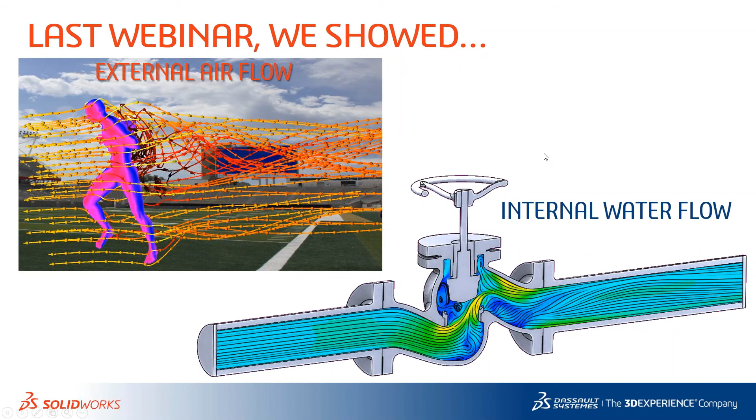You can look at this, and we'll come back to it possibly later on, but that's the focus for today. So just to recap, last webinar we showed two separate types of analysis: an external airflow calculation, where I was focusing on calculating pressure drops and drags, and also on meshing a very complex detailed model of a human running down the field. And then we did an internal water flow problem through a globe valve, and we were able to use our goals to calculate the CV value. So these are two different ways that you can use flow simulation, external as well as internal flow.

In that webinar, there are certain things we covered that I'm not going to have time to cover today: basically how to set up a new study, using a wizard to start from scratch or setting up a new problem from a template, using goals to monitor the calculation of specific things you're interested in, finishing the calculation when it converges, or calculating things like CV, pressure drop, drag coefficient. I showed you automatic meshing as well as manual meshing techniques for global as well as local areas, as well as adaptive refinement.

Result plots, I showed a few of these types: cut plots, surface plots, trajectories, and doing charts in Excel does it very well. And you'll see a little bit more of that today, because you can't get away from results when you're doing a presentation like this. It's very visually enticing as well, so we'll have a lot of nice visuals. And then there are multiple study types that I introduced: cloning, parametric studies, and running as a batch run.

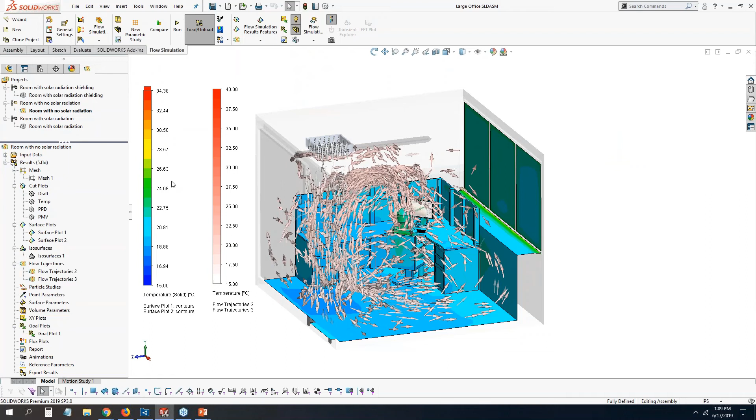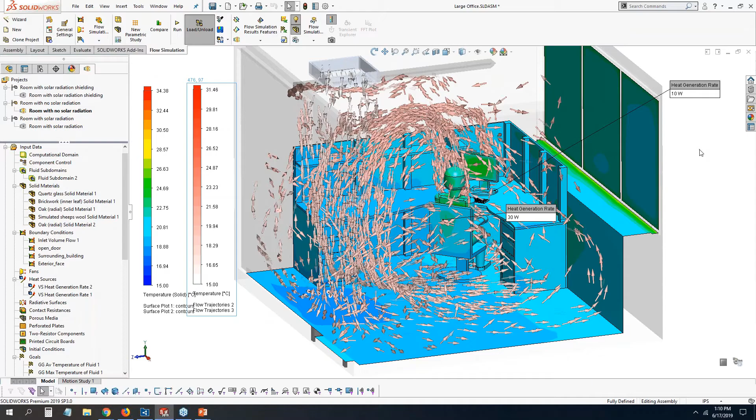All right, so in this example, let's play these flow trajectories here. What we have is a room with a dummy person working on a computer screen, and for some of these heat sources, I can display the callouts, so you have nice flags that you can show. The person here is generating 30 watts of heat, and the computer is generating 10 watts of heat. So you can see air rising, and I can change the temperature profile to get some hotter temperatures coming off of the body here. So you can see those listed like that.

Let me hide these callouts. This is just a typical setup that you would have maybe at night or after the sun has gone down, so it's a cool room. It's not really getting much above, say, 20 degrees C, 22 perhaps. But you can get an idea of the situation here. A little bit more of the setup is that we just have an inlet flow volume, so we know that there's an inlet flow of 200 CFM coming here.

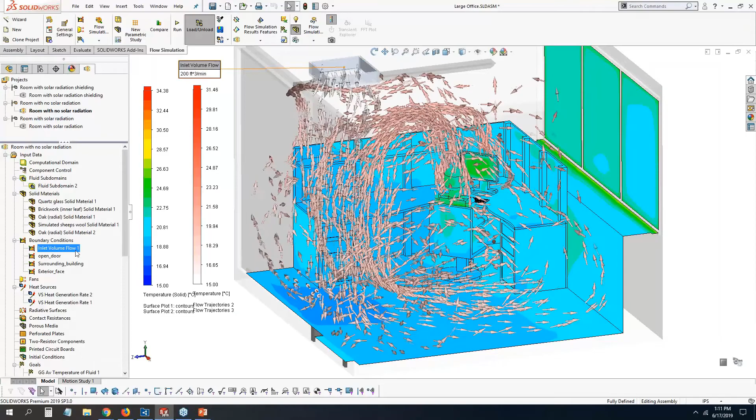Temperatures coming in at 15 degrees Celsius, I guess is kind of cold. And we can set those parameters here, thermodynamic parameters at 15 degrees C in our setting there. All right, so this person likes the room pretty cool. So we're just showing that as an example of that.

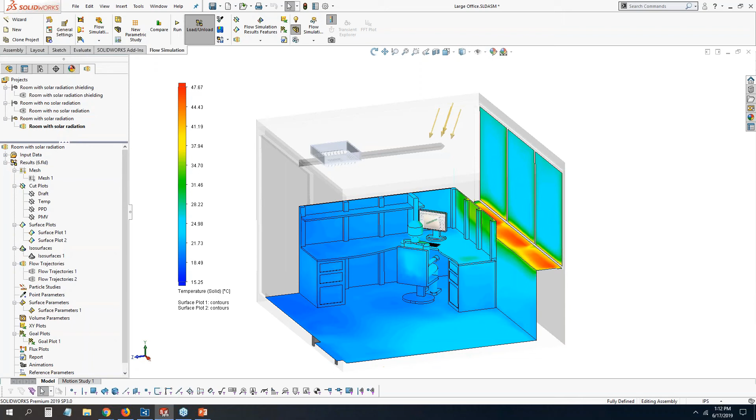Now, the situation changes when we have solar radiation, all right? And if we show these same plots for solar radiation, you can see that the solar radiation is coming in at an angle during a certain part of the day, and I'll show you how we can set that up. And you can see the result of that.

Sun is coming through the windows from the outside and heating up this shelf or area there, and even the person on this side is getting a little bit of that heat there. All right, so this is with solar radiation. Now, because this is such that you have that really powerful solar heat, and you may be familiar with that when you're sitting in a car or other things, the solar radiation can really heat things up.

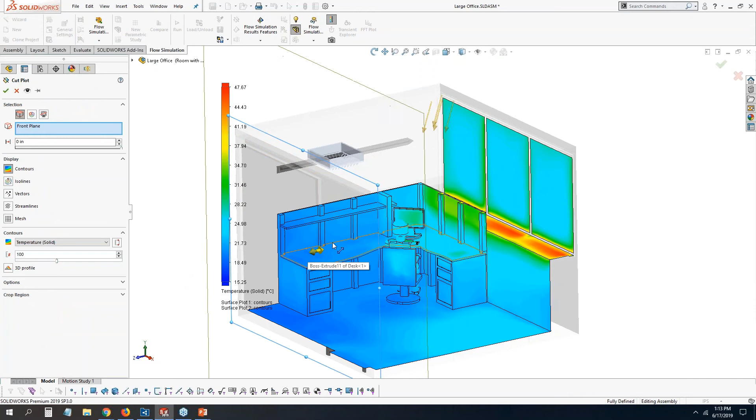So one of the things that we can use as parameters to determine whether it's a good environment or not, there's two ways, and I'll just show these at first. Let me do this cut plot, the predefined one here I set up. I guess it was not in a good location, but we can select here from our contours this predicted percentage dissatisfied, PPD.

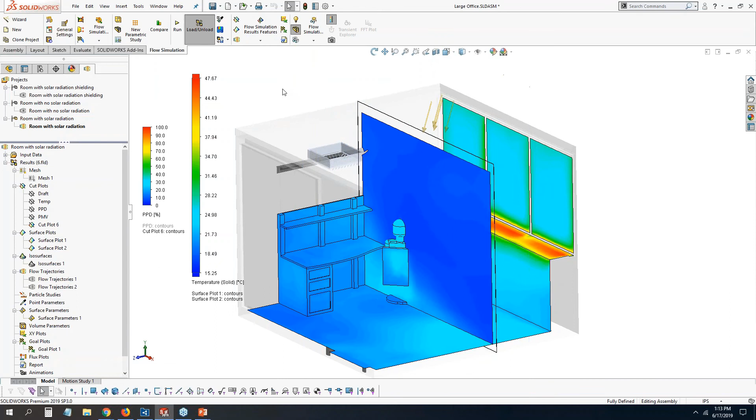All right, so you can see it goes from 0 to 100%. And if I move this along here to where the person is at, you can see it's relatively low, so it's a pretty good environment. Let me change this to have it on this plane here, and I can show a preview of this.

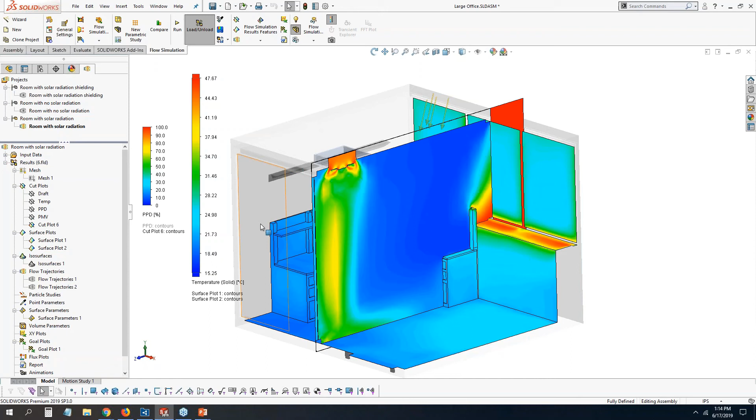So now you can see some more coloration here where there's areas, whether it's really cold or really warm, in which a person would not be satisfied in those certain situations. So these are specific parameters that you can calculate with the HVAC module, and it's a setting that you can define in your calculation control options when you set up your solving options, to click on here to calculate your comfort parameters. Now, again, that is only available with the HVAC module, all right?

And the solar radiation is something that I hadn't mentioned before, but with heat transfer in flow simulation, you can do all types of heat transfer, whether it be conduction, convection, and radiation, whether solar or environmental radiation, and you can do body-to-body radiation as well. If something is heating up, like an electric heater inside an oven, right? I have a simulation that I've demonstrated that can heat up the oven inside through just radiation, as well as conduction and convection to the air surrounding it.

Okay, so how do we set that up? Well, in our general settings, we have some options. So this is typically when you're setting up a new problem through the wizard and you're setting up your physical settings that you want to include. You can add heat conduction in the solid. It's always done within the fluid as well, right? And then you can add different radiation models. So one is called discrete transfer and the other one's called discrete ordinate. And I'll describe these a little bit better.

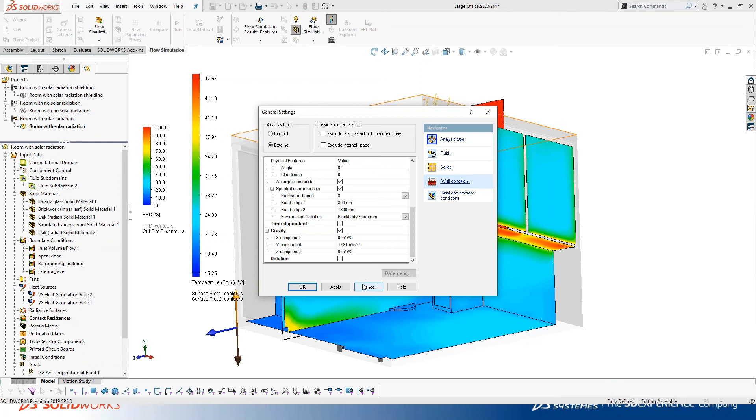And then, of course, when we're doing heat transfer, we want to include convection, and it's driven by buoyancy of the air as it is at different temperatures. So we always define gravity. So that's the basic setup for this problem. And you can see how percent people dissatisfied is set up here. Another parameter is predicted mean vote.

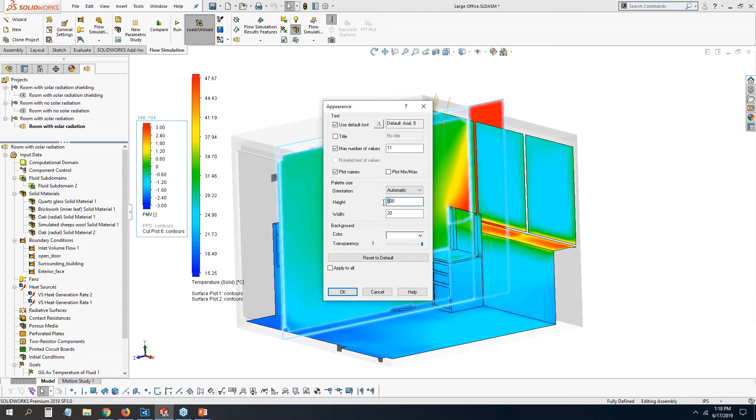And I'll show this, and it's on the scale between, and let me just set some options here so you can see it a little bit better. I'll make this 500. So increase it a little bit more here and set the number of colors. So these are things I didn't show before that you can do with the results. It's very interactive in a manner that you can define here.

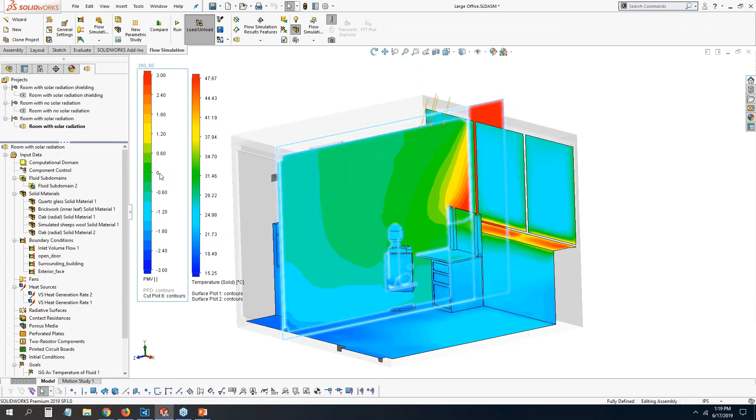So it's set from a scale from -3 to +3, and then 0 is the Goldilocks in the middle. So you have, as I call it, typically the Goldilocks values, right? So too cold, too hot, or just right. So predicted mean vote is set up like that. So those are two different ways that you can define as ASHRAE parameters when you set up.

And I will mention that if the person is here doing work, if you have it in a factory and people are working or something like that, you can actually define the amount of clothing that somebody has on and the amount of activity that they're doing. So those can all play into how those parameters are going to affect the people that are in that environment.

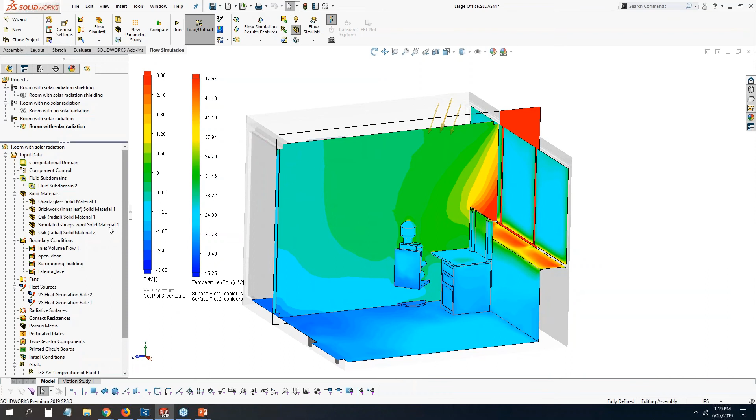All right. And then this other project, the final one I'm going to show for this one, and you can see by the descriptive name that I put in here, is with solar radiation shielding. So the glass, we can add some shielding onto that by defining that with a quartz material that will absorb the energy of the sun, right?

So when we're defining the material properties for the glass, both on the outside and then there's some glass windows here for the interior of their office, we can set this parameter and it sets it up as an absorptive type of flow. Now that's only again available with that discrete ordinate method, which is part of the advanced radiation module within the HVAC. All right.

So a little bit more information into this. In our material library, you can see here the absorption coefficient for radiation can be set through a table. And this is basically typical of glass material, and I'll show it in a little bit more, that it has certain bands of absorption at different wavelengths. So different wavelengths and the amount of absorption coefficient is defined like that.

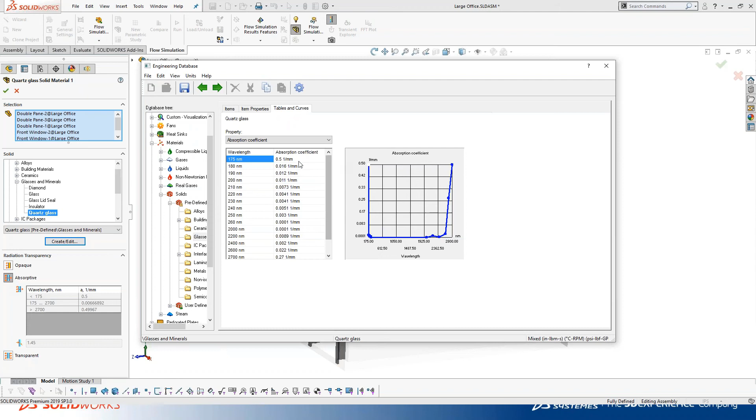So when I set up the absorptive radiation transparency, we have those 3 bands, and then it can calculate what the average values are in the wavelengths less than 175, between 175 and 2700, and then above 2700 nanometers in this case.

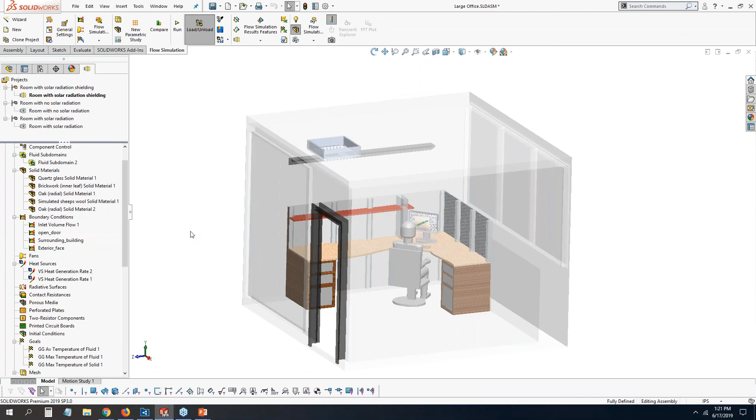All right. So now when I show the surface plot for these, and we're using the same scale, you can see that the reds are no longer red, they're orange, meaning a little bit cooler than before. So we have that absorption through the glass there, benefiting that, right? So that's an effect of it.

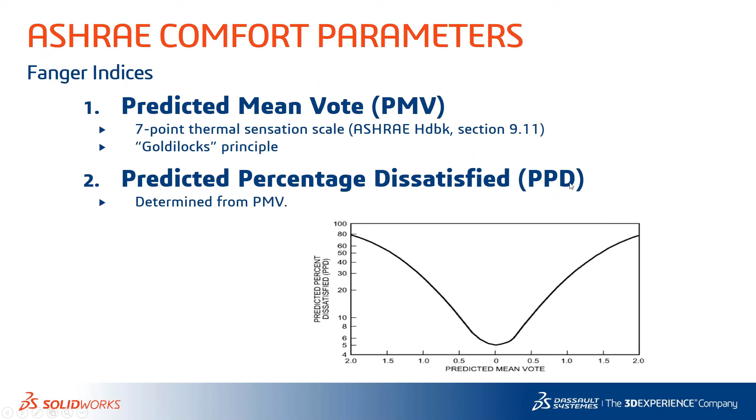So let's go to the PowerPoint and just review some of the things that we learned here. So these ASHRAE comfort parameters that I showed are actually called Fanger indices. We have the predicted mean vote, which, as I showed you here, is on a scale from -3 to +3. And the Goldilocks scale in the middle is where you want to be. And then from this scale, you can get a predicted percentage dissatisfied. I think I said percentage people dissatisfied, but that basically captured what it was, even if I got the initials wrong.

So the radiation, advanced radiation that you get with the HVAC can do a bunch of things here. You can also do irradiation at the surface, and then absorb it, and then transmit it. And when it gets transmitted through there, because of the change in the speed that light moves through, or radiation specifically moves through solids, it changes that, and you get a

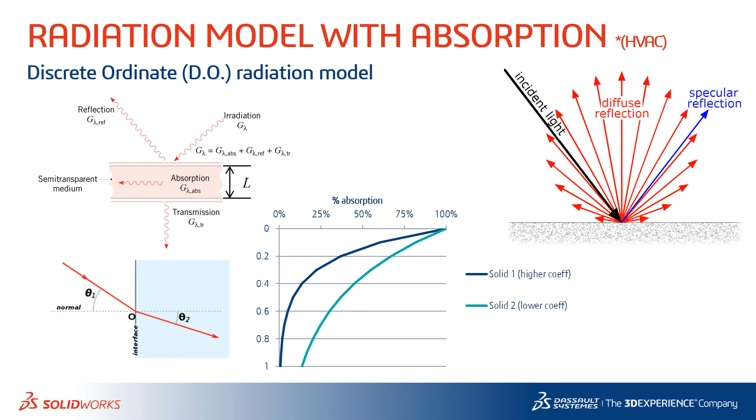reflection, right? And also, this handles not just specular reflection like a ray tracing method, but it can also handle diffuse reflection. And what this is showing you here is just basically how through the thickness of the material, with a higher coefficient, you get more absorption into the solid.

And this is showing you application of a thermal heater. Maybe this is a light with glass on the front of it, and showing you external flow around the outside and the temperature here. And this is showing you as a half symmetry model.

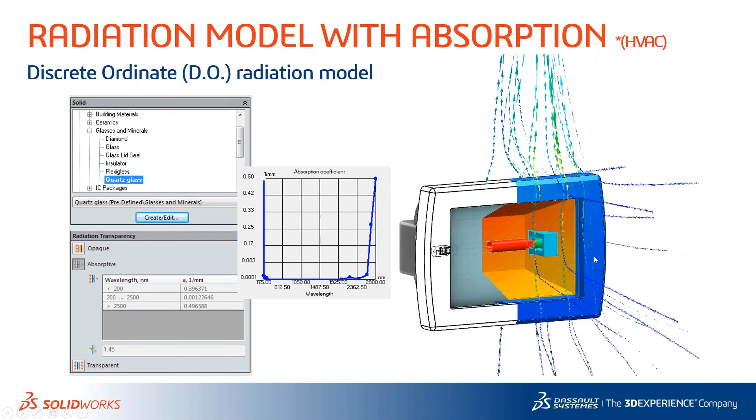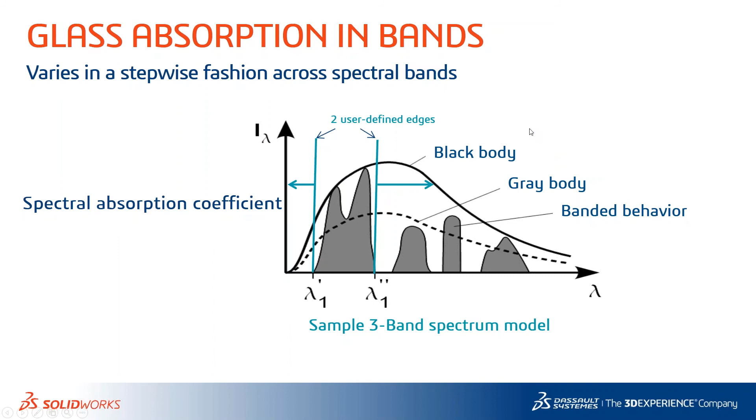So as we were reviewing those setups, I also mentioned that we have glass absorption in the bands. So glass typically lays up into different absorptions based on the spectrum as a banded behavior that we can really capture with this radiation model rather than doing it as a black body, gray body type of situation that you can typically do with ray tracing, setting up the emissivity values. So it's more comprehensive and can allow for real environments that are having these conditions like glass that you need to really include as part of the simulation.

And another type of simulation you might want to investigate is what happens when you're designing an HVAC system - what if a fire breaks out in a laboratory, right? Now, another thing within the HVAC module is the ability to do a tracer study. And then you can track if it's safe or not, and how much is the contamination removal effectiveness.

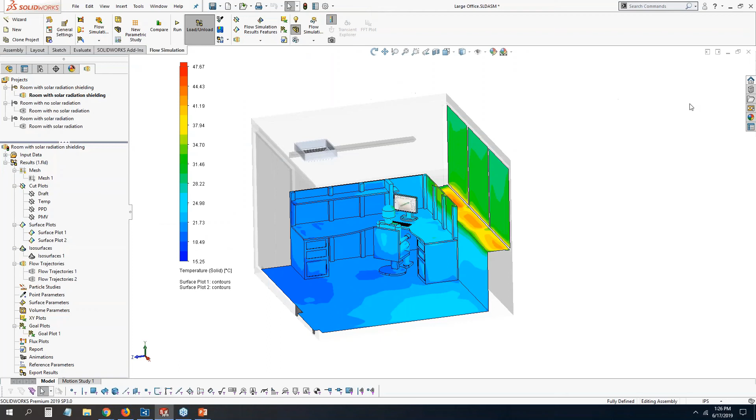So let's take a look at that with this next example model. I'm just going to pull that up here. And so the first simulation, real quickly, I'll just load this in, the results.

So we can define a heat generation rate. So this is the location within the lab that the fire, say, is generating a certain amount of heat, and that can be rising up. So the first thing when you're doing a simulation like this is that you run the flow simulation of the HVAC system, okay?

So we have an outlet here. I believe this is in the units that we've chosen. It's 211 cubic feet per minute, but I remember that this is 0.1 cubic meters per second in SI, the main SI unit. So that's about 200 CFM. And then it's pulling in air from the outside through these two grates here at the bottom.

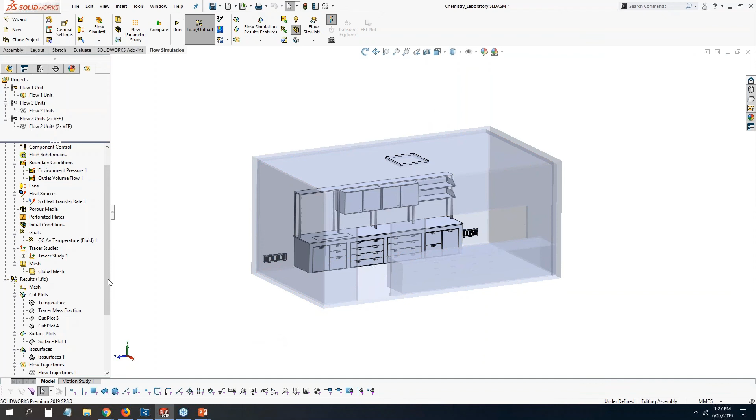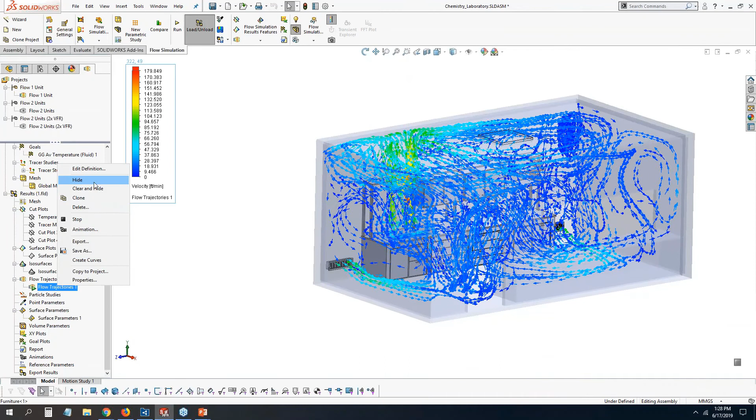So with the heat rising through here and the HVAC system fan pulling up the air out through here, we can see the flow trajectory is moving, and as you'd expect, the heat rising up above from where that fire would be. So this is getting the calculation of how the air is moving within the room for that system. And let me just hide that.

So now, once that simulation is done, you can introduce a tracer study, all right? And a tracer study is not a typical thing unless you're doing it very frequently that you would add into your tree, right? I think I mentioned this before, that you can customize your tree and add things that you typically would have within a study.

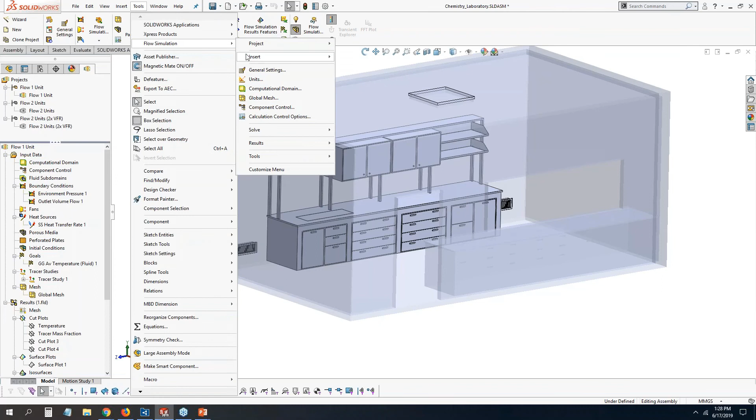And you can choose that here. And so if that isn't within your toolbar, you can always add that and insert a tracer study through a tool here. Let me see here, results - usually I just have it in my tree, so I'm not, but there's, here it is, insert a tracer study. So you can insert that into your tree for that particular project as a one-time thing if you wanted to do that. And then we can set up a new tracer study.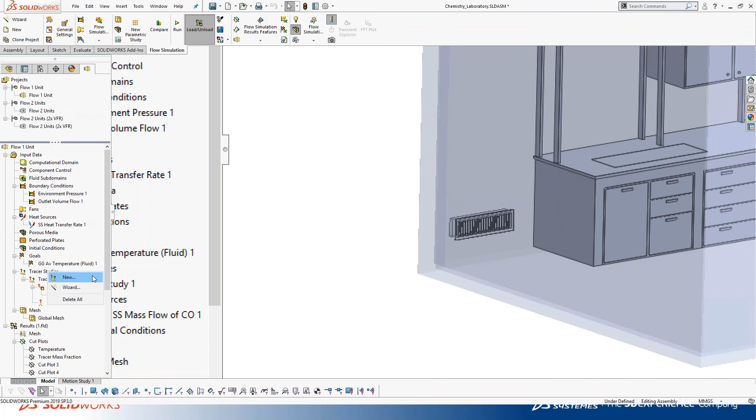Let me zoom in here so you can see this a little bit better. And it's similar to the way that we set it up from a whole new project. You can either do it new and set up all the settings manually, or you can go through a wizard.

So it's just working on that here. And the two things that we're going to be able to calculate from a tracer study is the local air quality index and the contaminant removal effectiveness.

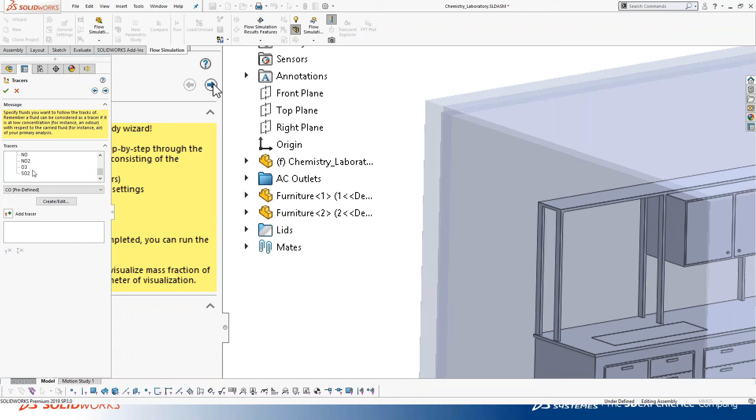In our tracer study wizard, we can click through here and define different tracers. These are different contaminants, as you can see: hydrogen sulfides, carbon monoxide is the one we're going to use, acids and things like that, SOXes and NOXes, I like to call them. Those are all different types of contaminants, and we can add that tracer.

Then we click on here whether we want this to be time dependent, running it for a certain amount of calculation time with a time step. Then we can find out what's the mass fraction in a location, so we'll put in, say, 80% mass fraction. The location can be a volume or a surface, so we'll define that. Then we can define this as a mass fraction mass flow or specific mass flow that's per unit volume, I believe. So mass flow here, we can set up like this.

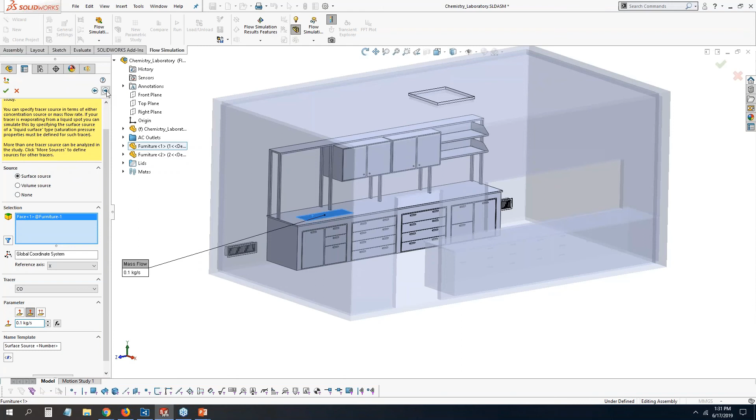And then you hit the run button. I'm not going to run this here live, but we already have the tracer study 1 that I've set up, and we'll take a look at the mass fraction of this tracer study.

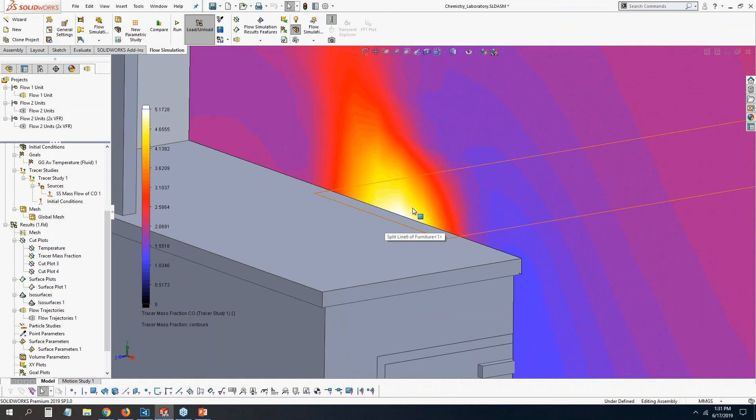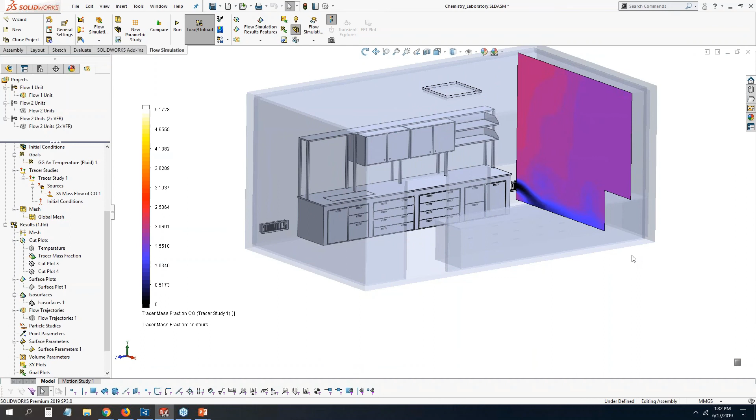You can see that the warmer areas here are where you have this contaminant rising up, and it still has quite a bit of mass fraction even at the floor. Let me play this, and it'll go back and forth through the entire room. So we have everything calculated in 3D, and we can show where the contamination is. So if you were going to try to get down on the floor and crawl out when this fire is, with this HVAC system set up, you probably have more difficulty getting out without choking on some smoke and things like that.

So you can change the units. Have 2 units that are equally combined to output the same amount of flow rate as the original one, but now it's separating them into 2. That's all done through configurations. And then because we're adding 2 different things, I add another project where now this outflow here is doubled. So each unit, instead of having a centralized fan pulling the same flow rate, each one has double.

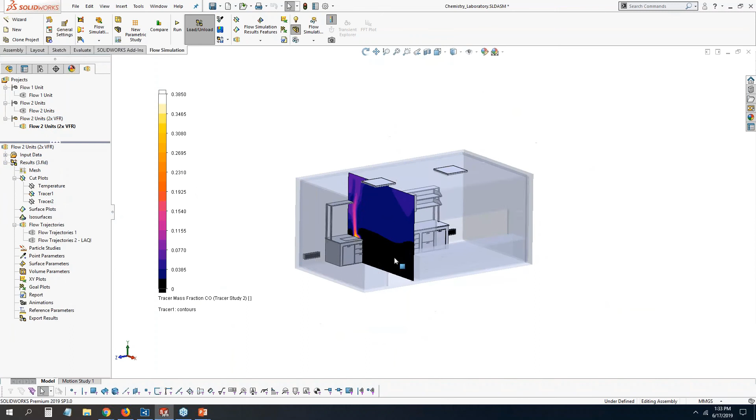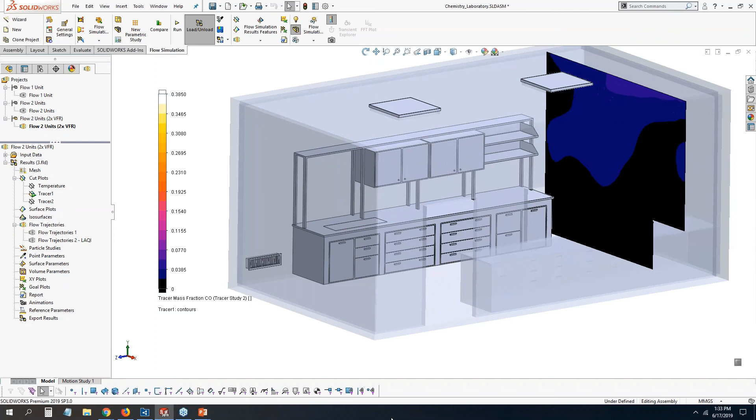So we can take a look at what this would be. And now we see the colors in black, meaning that the mass fraction is quite low, and it's not even going up all the way to 1. So again, if we play this, you can see that now in this situation with the correctly defined HVAC setup, you are able to get down on the floor and get out of that room safely. So that's what you're looking for.

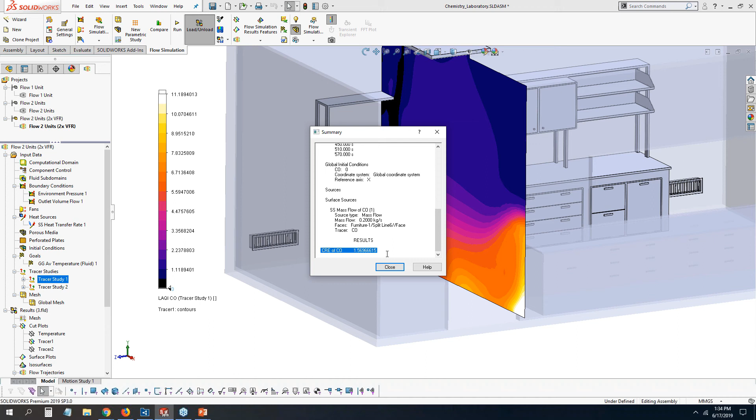So a couple things: we have local air quality index, which is another way that you can visualize those results. And in the summary, all the way down at the bottom, is where you can find the contamination removal effectiveness, which is a value that I had mentioned before that you can calculate through here.

All right, so based on time, I wanted to jump to this electronics cooling module so we can take a look at what we can do here with this type of thermal analysis. So why is this important? Because trends in the electronic product design field is increasing complexity in designs. Components are evolving, and we can add more complexity because we're using tools like SOLIDWORKS and our ECAD solutions to do these simulations. We have denser packaging, smaller spaces that are driving up the power densities. And we can use aggressive cooling techniques in smaller enclosures to remove all of that heat that we're generating.

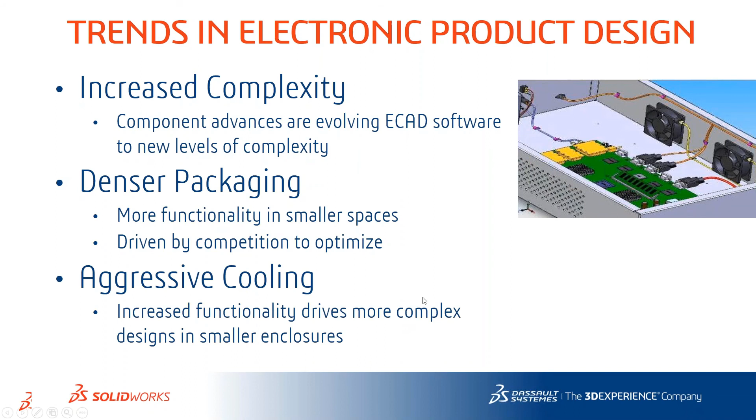I did want to mention, and I've written a blog post about this in more detail, the differences in thermal analysis capabilities that we have in our Simulation Professional software, which is an FEA solution, versus the CFD that we have with heat transfer, doing all heat transfer methods. The main difference is that the FEA is really solving just the thermal conduction problem.

The convection and radiation have to be done as models, whereas a flow simulation, as you can see here showing the flow streamlines, as it's heating up for a natural convection problem, you can see the flow pattern. It's able to calculate the H value, which is your heat transfer coefficient, which is very localized, and you're going to get different results in those locations where you have air moving. So there's very localized variations, and that makes it more realistic.

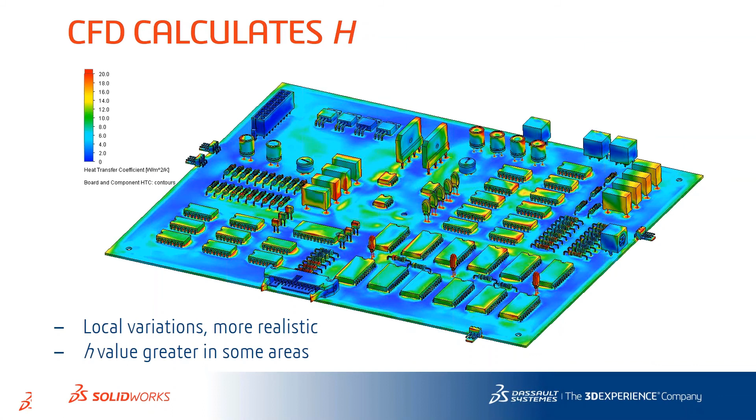So I like to use the analogy of a stadium. On the left-hand side is where we have SOLIDWORKS Simulation Professional, and on the right-hand side is where we have SOLIDWORKS Flow Simulation, or SWFS. The FEA approach is like the Goodyear Blimp - it gives you a good overview of what's happening, maybe a bird's eye view. But if you're looking for more accurate results and want to get closer to the action and more realistic, you want to get in that front row seat by using flow simulation.

So you can get very accurate results, even within a small percentage of actual results. It may happen to just differ by how you set up the problem and how that reflects what is happening in the environment around you.

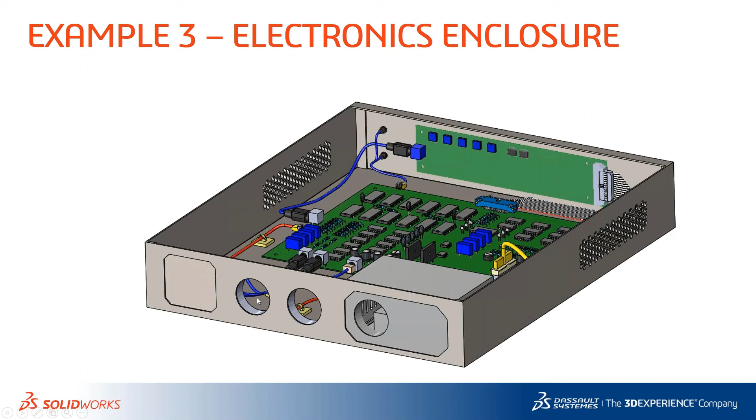So the third example I'm going to show you is this electronic enclosure. You can see there's a lot of detail within here. What's not shown in this image is there's 3 fans, and we're going to actually simulate that through a fan curve, so that's why they're just simplified here. We're going to investigate how we can use a solution to look at 3 different possible ways.

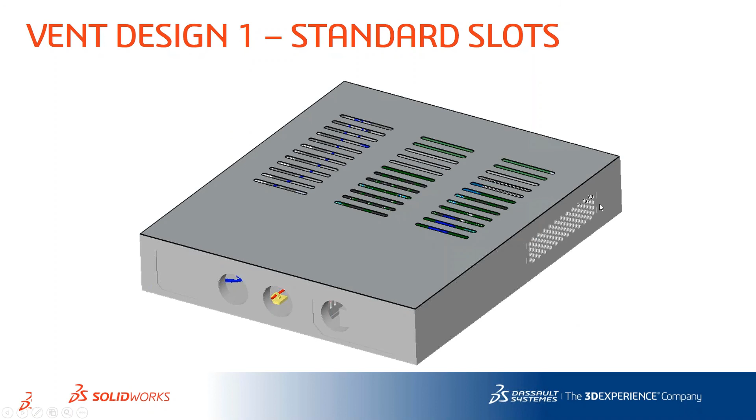So this is a forced convection problem, and we can have a top that has no vents on it, so it's just a solid top. One that has vents on the top, some slots, something very standard. You'll notice there is some venting on the sides using a hexagon shape as well, and that's true even in the solid top - the only thing that's changing is the top.

And then we have a custom venting design that's very open, a lot more space letting the air move out. The idea is we would think that maybe letting more air escape through the top will be a better solution. So let's take a look at how we can set this up in SOLIDWORKS Flow Simulation.

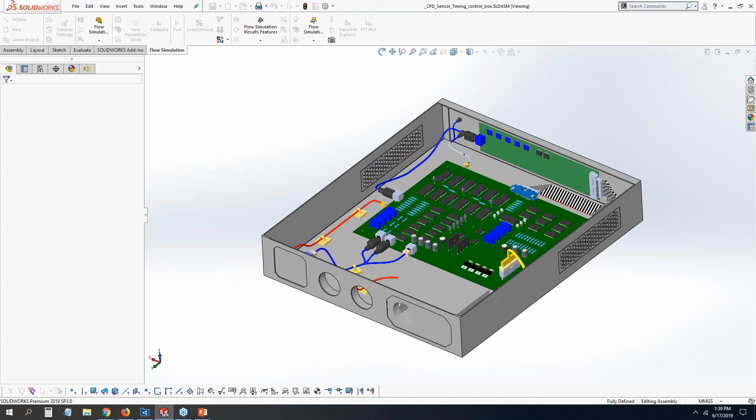So there's a lot of things going on in this electronics cooling module that can really help you out with solving problems just like this, and I'm going to help highlight what those are. One of the things is that we have a whole library of solid materials.

The library has been increased with not only solid materials - we have additional alloy materials, polymers, interface materials, integrated circuit packages, metal. So that's been increased.

Also, while I'm in this interface, we have fan curves, not just the standard fan curves from Papst that come with the standard package, but all of these different ones from Comair Rotron, Delta, all the major fan manufacturers used for electronic enclosures that you can list here: Sanyo Denki, Sunon. These are all ones that I have used in different applications, depending on what the customer is using and things like that.

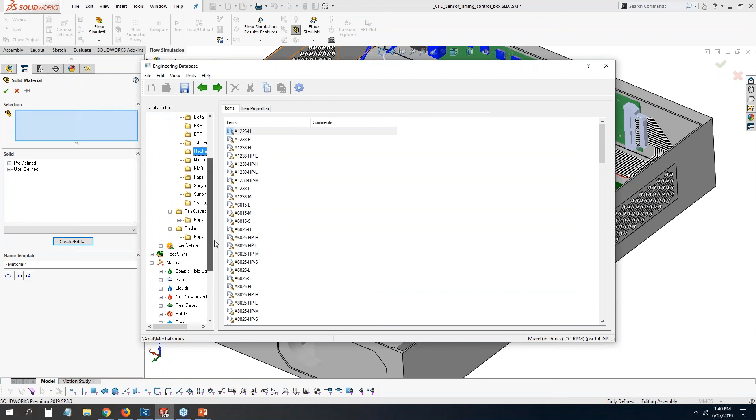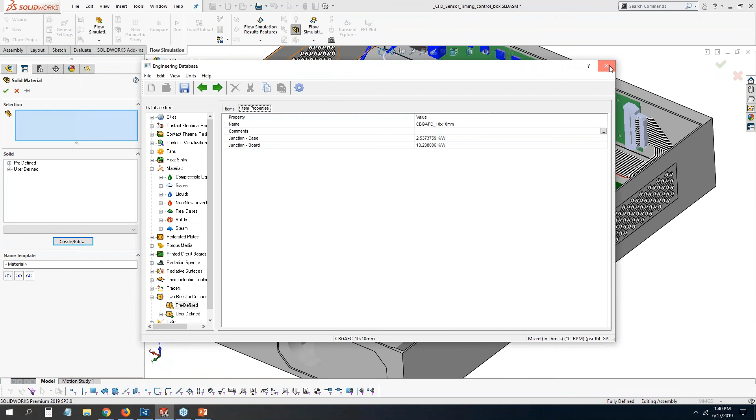And then also we have 2 resistor components. I'll also mention all these ceramic ball grid array, chip array, small package - these are all just defined through a junction, junction to case, and junction to board temperature. Because at the end of the day, what we're looking for is the junction temperature.

So the library is a big feature - these are not things that you have to go out searching for on the internet or from other sources. They're available right from this library that we offer with the electronics cooling add-on. So that's huge. We've defined all these different materials, for example a typical chip material for all these integrated circuits on the board.

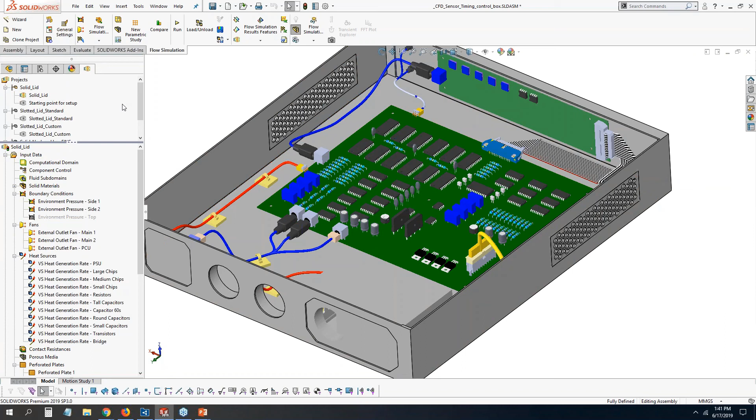Now, the definition that we're going to define for the flow is just two pressures on either side that are open, in this case, to the hexagon perforated plates on the sides, as you can see here, right? But because we have these hexagon shapes, there's certain geometry, and they could even be smaller. You might see on electronics very small dots and things like that that are used to allow airflow.

A better way of approaching that problem is through defining perforated plates. So basically, you can simulate the pressure drop that is happening through a plate like this simply by defining some parameters in this perforated plate setup. So you can define it as a regular polygon, rectangles, round holes, or even a complex shape.

And with this polygon, since we have a hex shape, we have 6 sides, each having a side of about 0.15 inches, 0.14 inches. And then that calculates the free area ratio, which then defines the loss of pressure that is going through that. So that all comes into play. Let me go back to my slide here. I hit the wrong button to get out of the zoom mode.

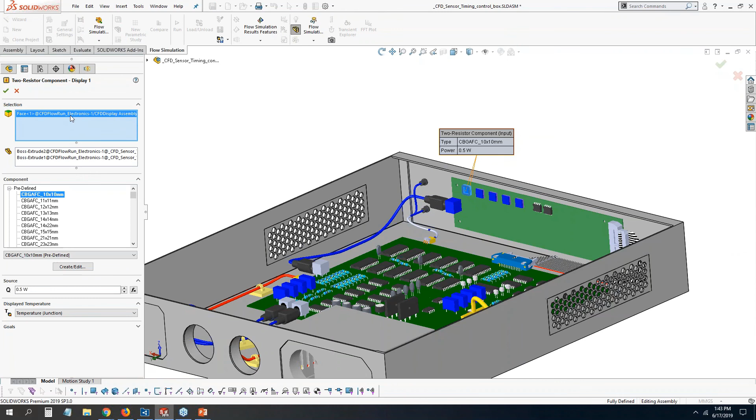And so you can simplify the model and accurately include these shapes without having to mesh them. So there's perforated plates, which are again part of the electronics package. And then we have some components that I alluded to in the library where we can define 2-resistor component definitions. So you can specify where the hot side is, okay? So that's the outside ambient selection.

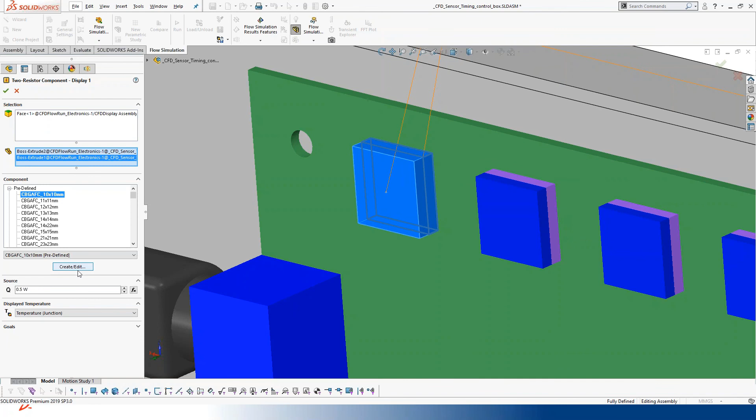The components that are included within here, so we have the board to junction, and then junction to case. And those are then defined with the amount of heat that is being dissipated. And then the ceramic ball grid array, 10 by 10 millimeters, has in this case, the first one, that thermal resistance value in the units of Kelvin per watt. So every watt, this is the amount of temperature that it is increasing.

So again, you're simplifying this package here, and you could have several of these, and these are all defined the same way, just by a simple vertical thermal circuit. If you think of it like an electrical resistor, this is the thermal resistance, and you have 3 nodes: the board, junction, and the case.

And when you define this thusly, you also have a goal that you can set up automatically to give you the junction temperature, and then set that up as a goal that you can use for convergence if you wanted to. So that's nice to have.

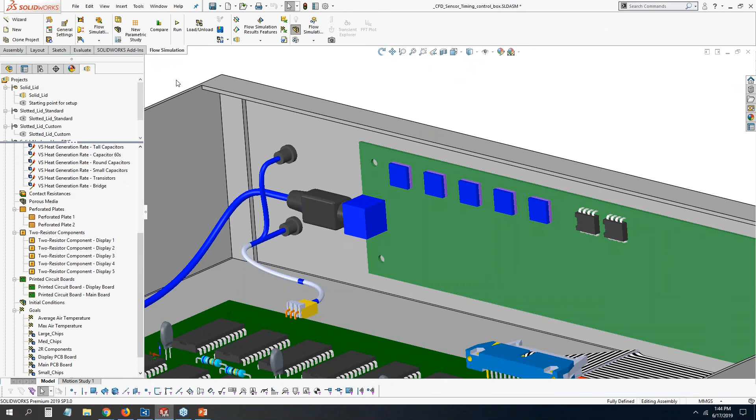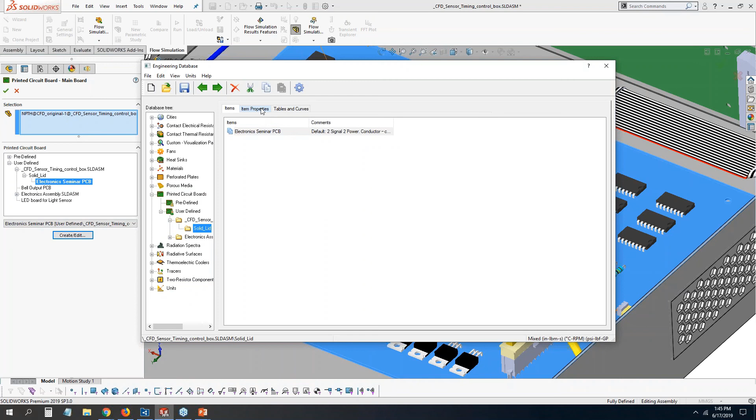And then we have printed circuit boards. And you can see here that we have a simplified solid model that is defining the circuit board, but in reality, there's different layers of copper on that and everything, and we want to capture that. So we can define a printed circuit board in a way that, again, through the library, you can set this up. And what it does basically is, these are automatically set up.

So you have FR4 material, which is your dielectric. These are all the material properties for that. The conductor, these are all the properties from copper. You put in your total thickness of the PCB, and then all these values, which are in-plane and through-thickness conductivity, all of these ones in gray are actually calculated, right? And then for doing a transient analysis, you need the effective density and effective specific heat.

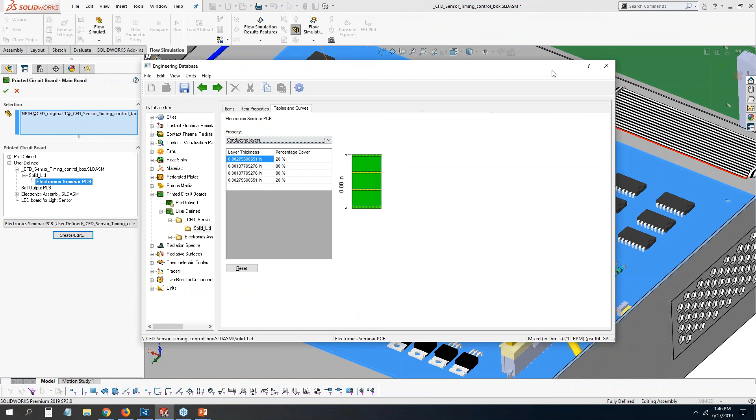But you're basically setting up in a table that you can get from a PCB manufacturer the thickness of each layer and the percentage of copper of the conducting material on each one of those layers. So this is a simple 4-layer board, defining the amount of coverage of the conducting layers on that. And what that then does is, as I mentioned, heat can spread out along the board laterally, but through the thickness, it's not going to conduct as much. And that's how it is in reality when you have PCBs.

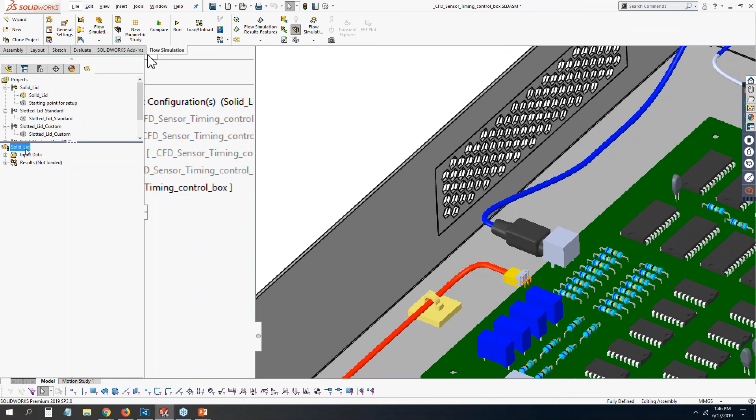All right, so we have these solid lids, and then we have different configurations that are set up here. Solid lid, the custom slotted lid, and then the standard slotted lid, right? And I showed you last time how you can clone a study, right? And copy the results, and then this would be a slotted study. And then using configuration, we can select the slotted lid configurations and then just clone those 2 studies and then run those in a batch run.

All right. And let me load these results for the solid lid. And once all of that is done, you have all the results for all 3 different situations that you want to set up.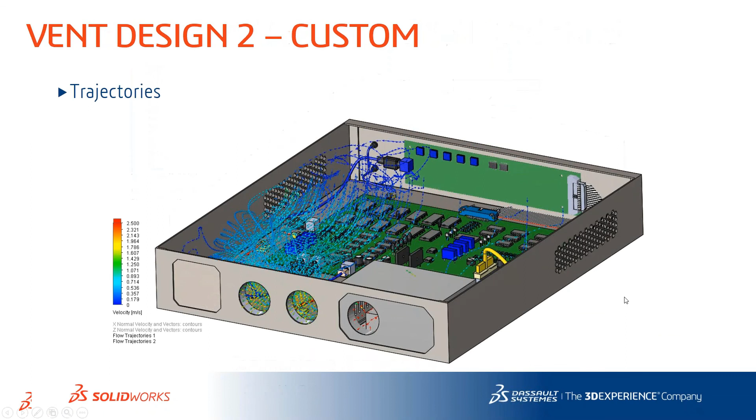We have the custom one with the custom vent design. And then this is what you can do. You can compare the results. So I wanted to show you how you can do this through here. So the compare results. So we can take a look at different things. We can take a look at images.

We can take a look at any one of the plots that you want to compare, and everything will be set to a standard slides. But we're going to do this just as charts. So we set up some goals that we want to use for comparison. And then we choose which projects that we want to compare.

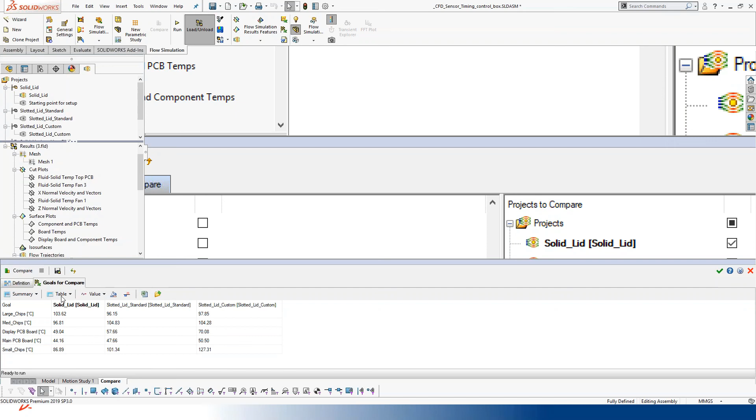And you can see here then the results after you hit the compare tool, and you can show these as a table, you can show them as a chart, and I prefer to show this as a bar chart. And then you can export that out to an Excel spreadsheet, and it dumps it out directly into a format just like this. Then you can present these results, putting them into a PowerPoint, just like I had done here.

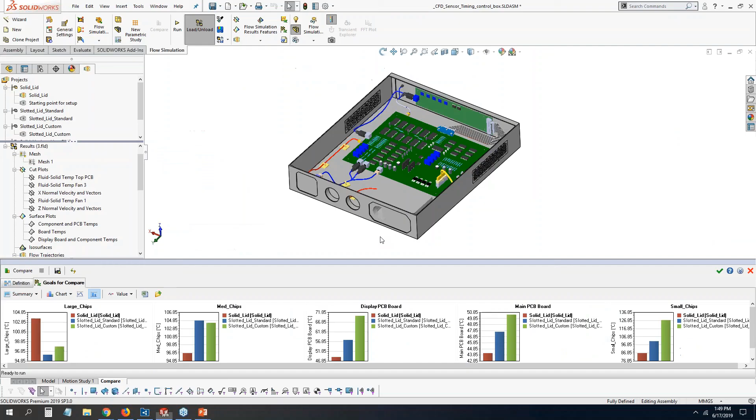So it's a great way of comparing different designs and getting to the best solution, which happens to be the lowest one, the one with the solid, the one in the middle. And the reason for that is that in a forced convection problem, as opposed to a free convection problem, the fans are doing the work of pulling the air through here.

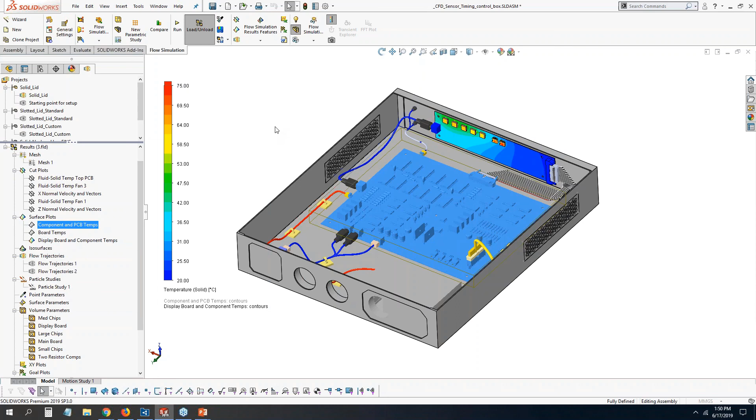So let's take a look at some of the plots. Let's show the temperatures on the board, on the display board in the back there, on that board at the bottom. And once that is done painting it, I'll also show you the ability to probe the results so you can get a finer result of the things shown on the screen.

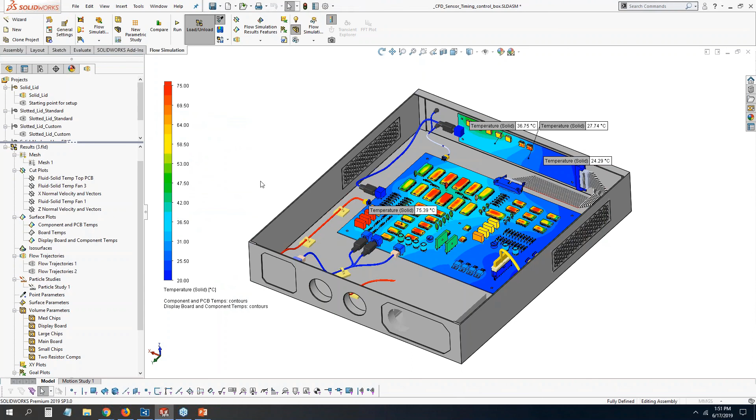So you can probe things at these locations wherever you want, drop those, and even just hovering over them, you can utilize them for reading the results. It can help you to interpret this. So even if you change to different values like heat transfer coefficient, those values will stay on there, and then you can use that to compare.

And you even have the ability to change these flags to show multiple things, not just a single thing. When you click on a probe, it shows you what is shown on the screen, the color based on the legend, but then you can add additional parameters on there as well.

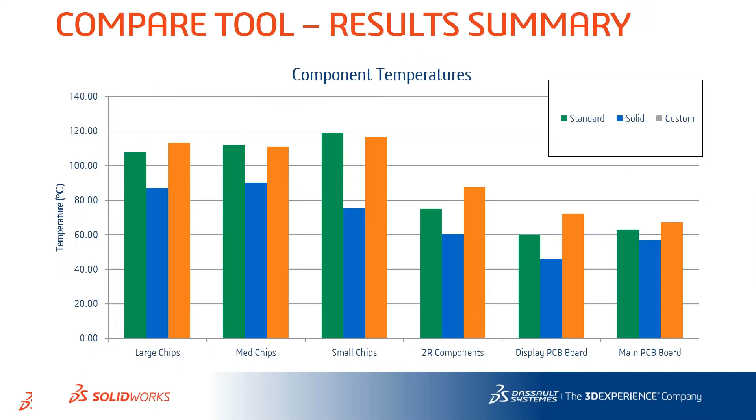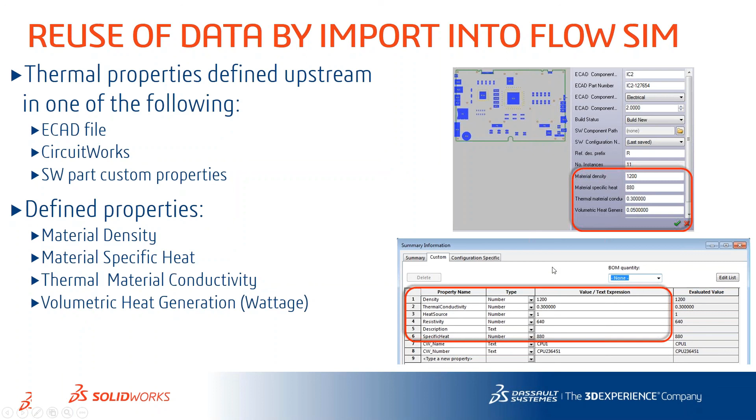Another thing that I didn't have time to go into today, but when you're setting up your ECAD solution, if somebody has defined within the properties of each of the components the material property and the amount of heat that is being given off, then that can be imported directly into flow simulation. So very quickly, you can define all of these heat sources just by importing those into here.

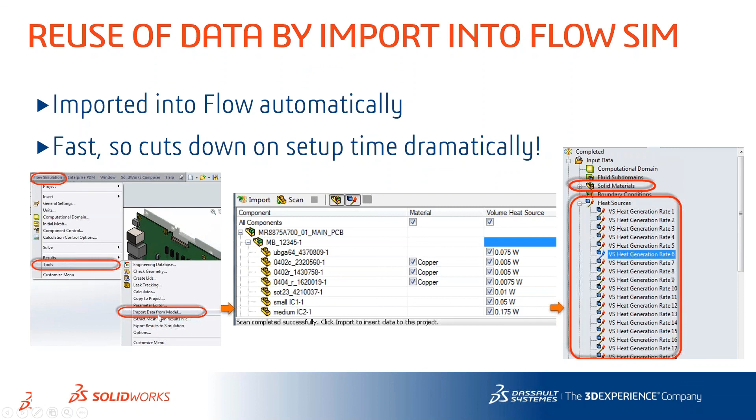So for example, you can see the material properties being imported as well as the volume heat source. So that's through an option of just importing the data from the model. It can save time dramatically. So a few of the other things that I showed you here is 2 resistor components. So these are all the different types of components that are in the JEDEC standard models that we have for a vertical solution. Like I mentioned, board to junction to chip or to case.

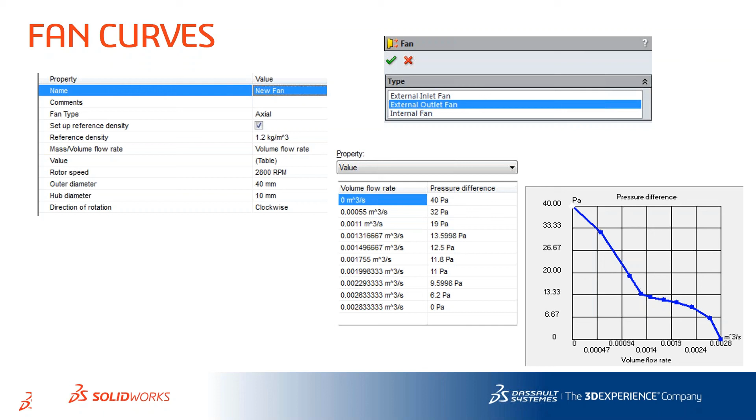I showed you the perforated plates and the ability to define those in different ways. I also talked real quickly about fan curves and the ability to even define your own fan curves if you don't have those, or choose them from the library of the popular fans that are available from Delta, Sunon, Sanyo Denki, and many others. And then I talked about the printed circuit board and being able to define that. You can't do it otherwise in any other add-on package for flow simulation.

Now, just real briefly, I knew I was probably gonna run out of time to show you this lighting model, but I wanted to just briefly mention that there's an application if you're in the lighting industry, LED lighting industry more specifically, and you have these diodes. So the diodes can be modeled as a 2 resistor component, and then you might have glass that is covering the front of this light fixture, right? So that's an application that can use both of these add-ons, HVAC and electronics cooling, the LED lighting industry. So if you're in that, you maybe want to investigate that a little bit more.

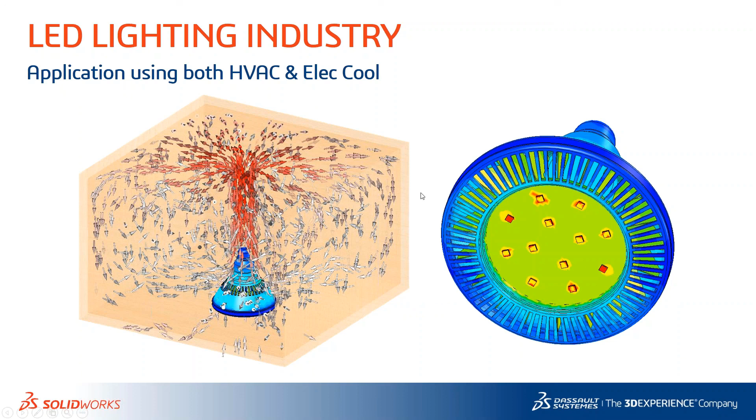And just if you're interested, this is a natural convection problem. So the heat is just rising due to the heat coming up through these vents around the outside and then coming out here. So another thing that you can calculate for UL requirements is the temperature on the outside of the bulb. All right, and this is a standard test that they do in the lighting industry where you enclose it in a box of a certain size and you run it like that.

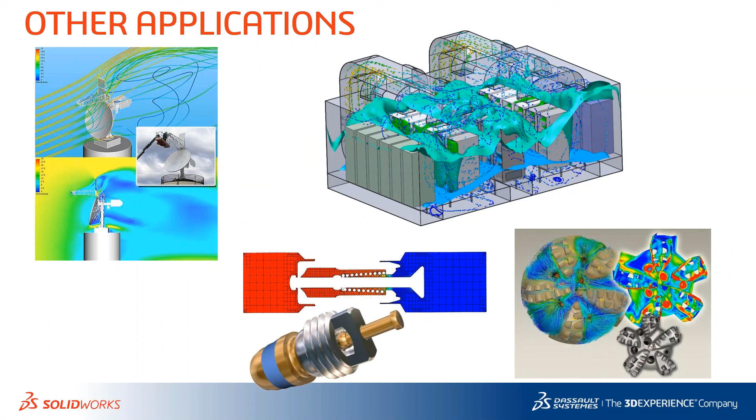So we're getting towards the end of this webinar. I just wanted to mention other applications if you're interested in doing external aerodynamics, internal flow for large buildings or 2D transient simulations. We have those capabilities, as well as doing pressure drops, pressure on dishes, data centers, valves. This one on the bottom right is a drill bit head. So we can do that for the oil and gas industry, which is where this one comes from. Valves, rotating flow, transient flow of a medical dispenser.